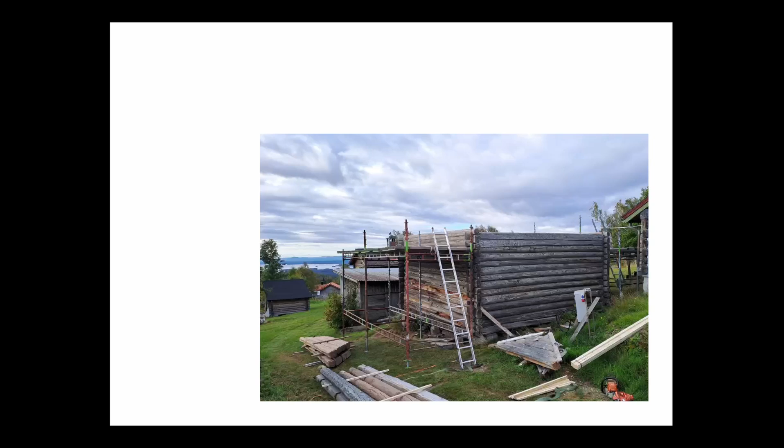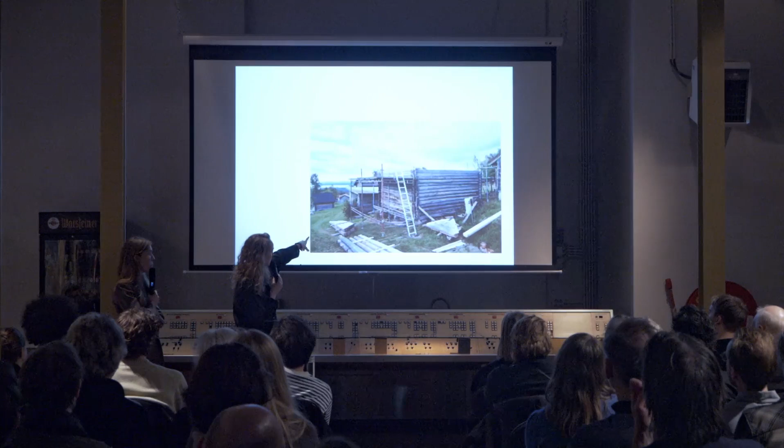In Fryksås, this is the site we're working on, and this is one of the buildings that were there when we started working. This is reused, so it's taken down piece by piece. You can see it's just put there on the ground.

The wooden logs are often really okay because they are grown super slow and allowed to be super old, so they are really in good condition when they are taken down. They can last for several hundred years.

So when you do something like that, you have to mark every log and replace the bad ones with new ones, in exactly the same manner, so this meeting is like the same meeting as that meeting.

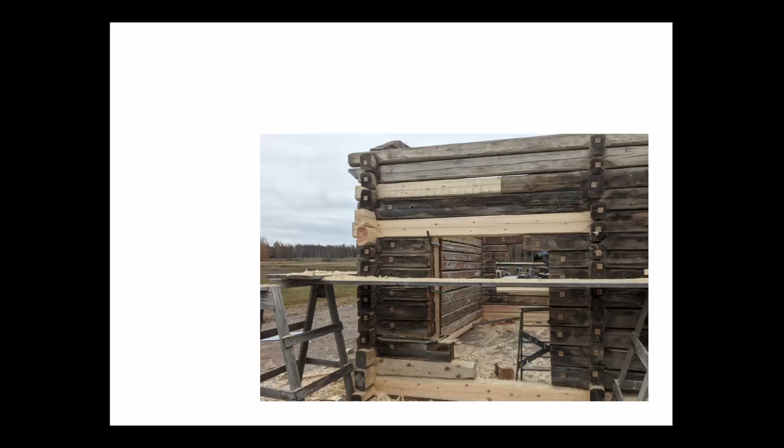This is often done not on site, but maybe at the workshop of the craftsman doing it. Here you can see the new logs and how you mark them to work with them. So it's actually quite easy to move an entire house.

Then the house is ready to be assembled on the new site, and that of course requires a lot of on-site engagement, as I will do on Monday, for example. As you can imagine, you can't plan everything down to every millimeter. You have to be able to make changes during the building process.

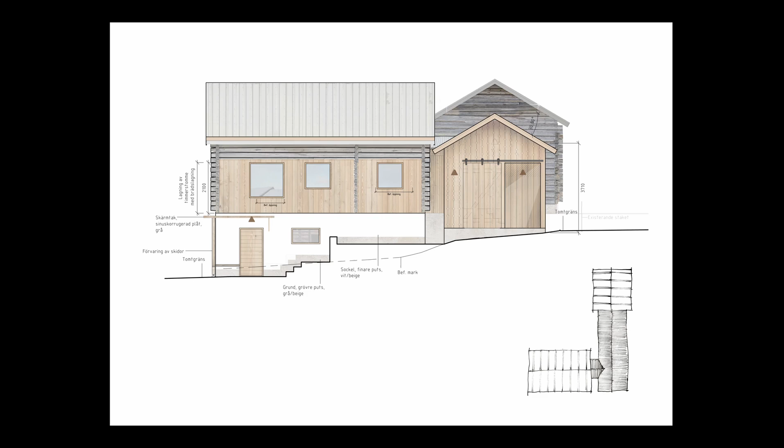Because the timbermen working with this can't really answer before they've done anything, it's very common that we're on site taking decisions, making decisions, trying things, depending on how the status is on the logs, etc.

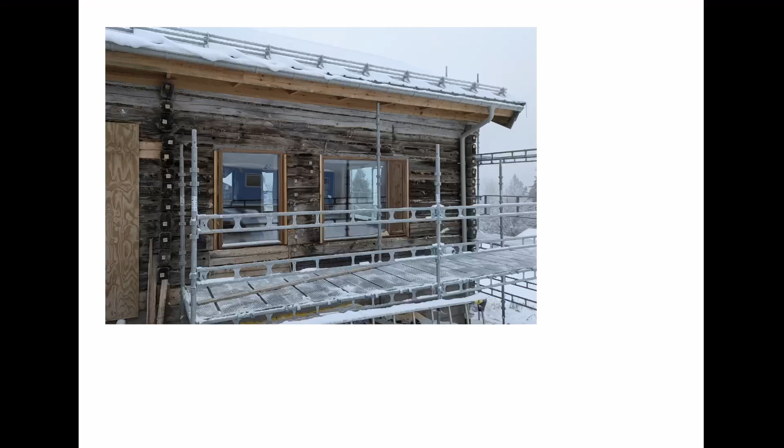This is a picture from some weeks ago when the snow had come, and you can see the windows are coming in. The windows differ quite a lot, and we had to find a rhythm with them because it felt good to relate to the openings already in the timber facade. We can't see it as a blank paper and put windows where we want; we have to look at where the logs are already cut, how wide it is, and how we could find a pattern that fits there. Otherwise the timberman is super annoyed, and it feels a bit strange too.

So that was actually a project we worked a lot on. Reuse was the start of the project, and this is another project where reuse was the starting point. It's a transformation of an old stable into part of a residential house or a home, where the stable was going to be the living room.

It's situated in a rural environment as well, a bit dense rural landscape, and what you can see a lot in the Swedish countryside is that most of the houses are red. So this is a really typical barn stable that you can see on the countryside in Sweden.

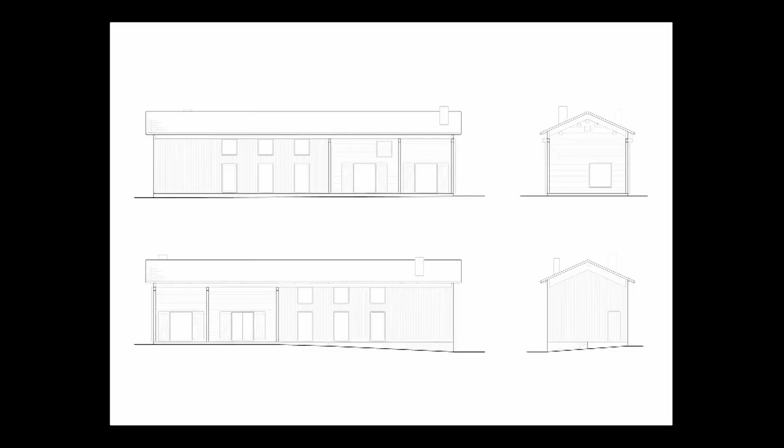We had to make a few adjustments to the roof, because when adding insulation, normally you do it on the inside or on the outside. We were talking a lot about how to do it here, because maybe it would be a good idea - since it's in this cultural heritage area, the exterior is really important.

But that room, and that roof, was so important for the experience of the room and the space. So we added the insulation on top of the existing roof, which gave this new hat in a way to the house.

So this is the existing building, and then we have this add-on here. You can see the old part and the new part. The black, everything that's black, is what's new, and the white is the existing building that was there before.

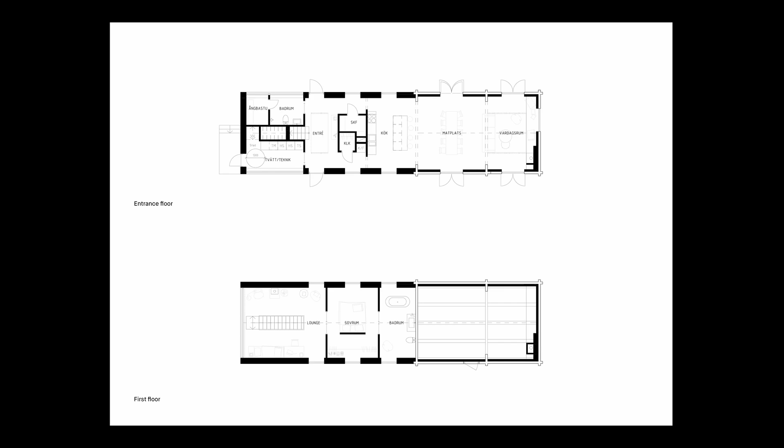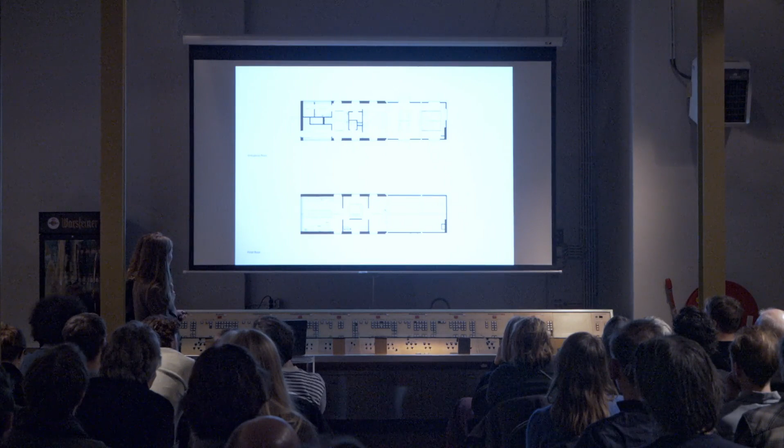It's actually this one, which is full length up to the ceiling, and then we made a two-story building next to it, connected to it, with entrance floor and first floor.

What was really important for us was the great experience in the room - that you have the connection to the roof, the facade wall, and that you are in this big room.

So it was really important for us to have this room's presence everywhere, actually. We made this small add-on in the middle, but otherwise the movement is throughout the facades.

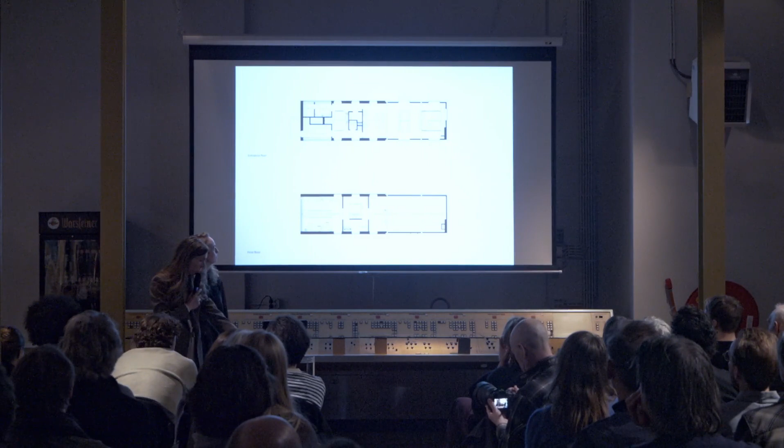In the project we showed you before, we took down each piece to move it and restore it. But here instead it was in kind of good condition, so instead of taking it down piece by piece, we lifted it to the side.

Actually, this is quite easy - well, of course it's not quite easy, but it took a few hours, with a lot of preparations before. It's not that big of a deal actually, but it takes a lot of preparation.

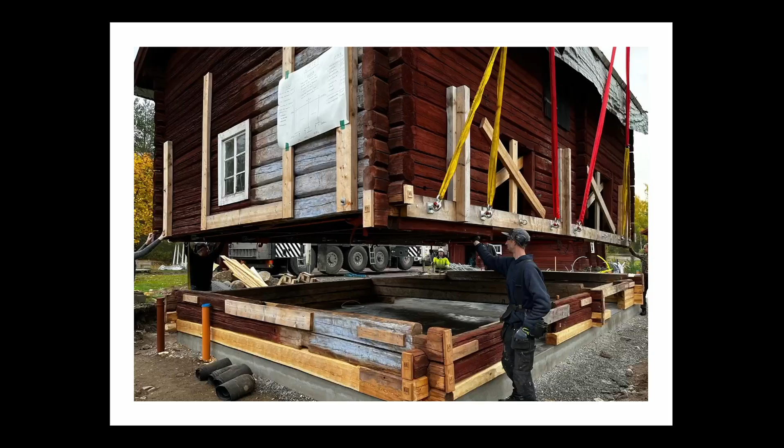Here, when moving it back, we took the opportunity to rotate the building 180 degrees, and then did some other things as well.

This is where we put it back together, and here you can see the joints where wood is connected to wood. When it's connected to these lower parts, you don't need to reinforce it in more ways - gravity is holding everything together.

Here you can see an example that the windows are still in, and it's perfectly fine to move it. You can see how they needed to secure the openings and add the beams to be able to lift it.

And here you can see the new concrete slab as well.

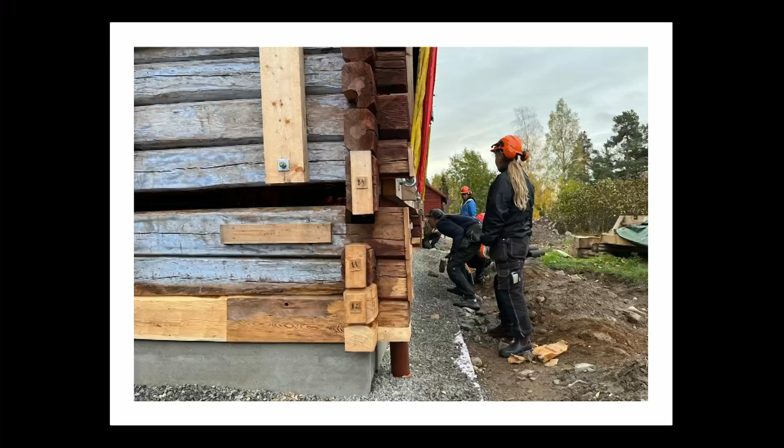Here you can see also that it was marked, because some of the logs were fixed during the renovation part.

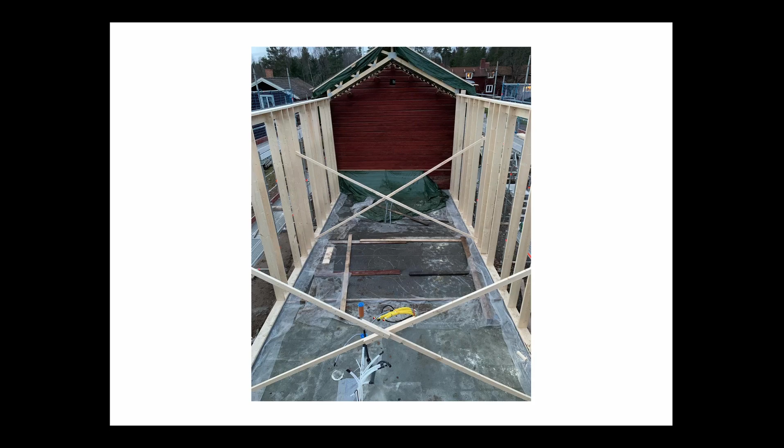And here you can see in the background the existing building, and here is the add-on that is with the timber log, like a new wooden frame structure.

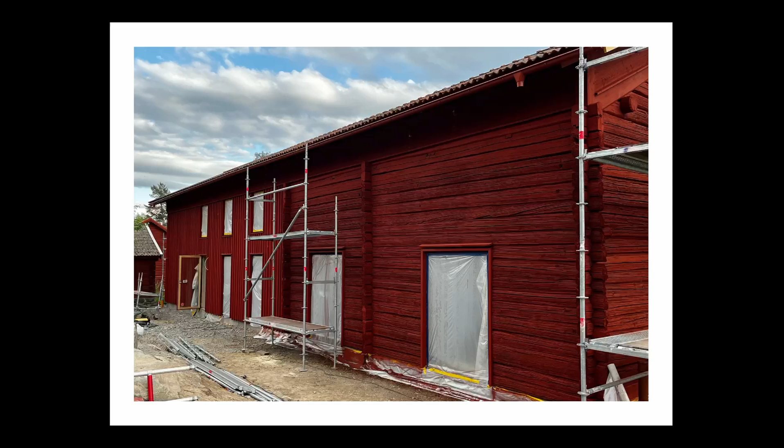Here you can see the two different parts: the old log house and the new timber, the new wooden frame house. It will always appear as one unit with a red paint, but it will always be very visible that it consists of two different techniques, with a very visible joint between old and new.

We worked a lot with how to frame the windows, and it looks really easy here, but to make it this narrow and thin, you have to work a lot inside the wall to make that possible. Because especially the old logs, they are not very precise. They are worn from weather and time, and you need to have a large distance for putting in insulation and everything. So it's a meeting between something done very rough with a chainsaw or axe, meeting something made in a factory, very narrow. So it looks simple, but it's very hard.

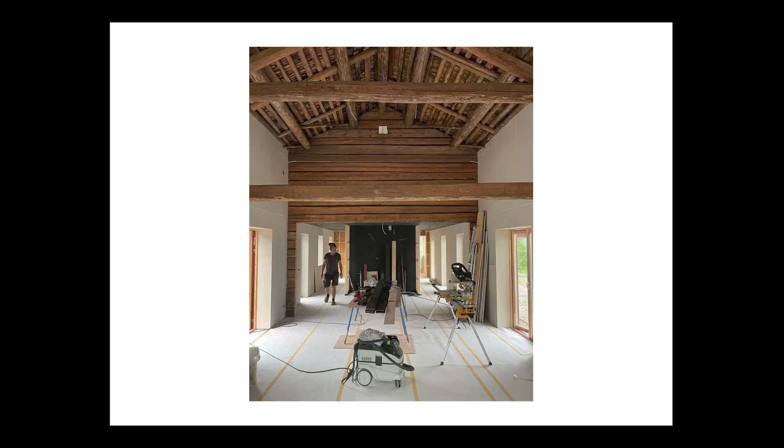And this is a picture from inside the stable with one of the clients going around working in the house, with the old roof and the insulated roof on top of it.

And why we wanted to show you these two projects is because we like to study historical techniques, historical buildings, historical wooden techniques, and learn from them. Our aim is to learn from the history, but also to move forward, so we want to incorporate this in contemporary architecture as well.

So these were two projects where we reused an existing structure, but we were really eager to see how we can work with these old timber techniques when making contemporary architecture, taking it into a more contemporary expression.

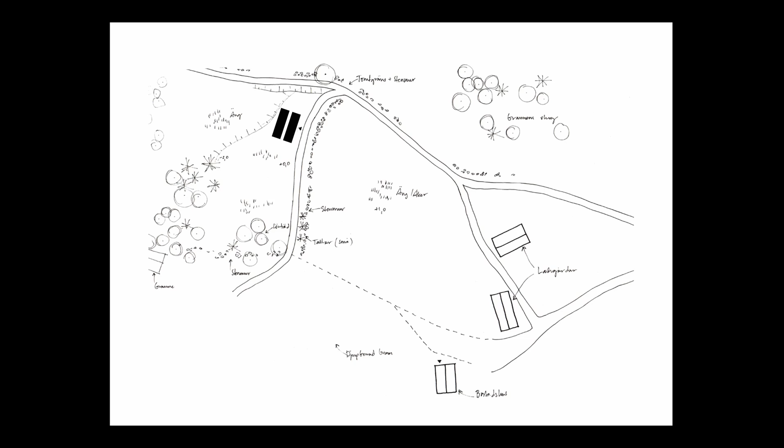Okay, so Höghult, which is the name of this small village, where the clients had this old farm with a lot of land, 3 small buildings, and they needed some extra space. So it's an addition to an existing farm. They wanted really small functions, a sauna, more bedrooms, and they wanted to be able to enjoy the view, which you don't have from these buildings, but you have from that site.

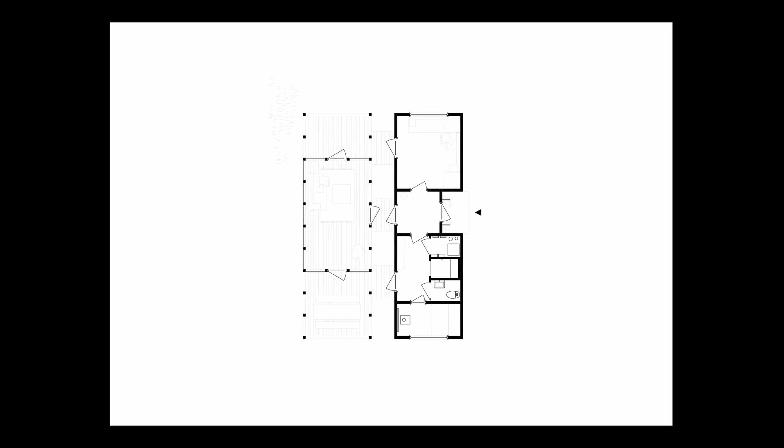And the road, there's a small road passing by this side of the house, so we divided the functions into 2 buildings. These functions here, like the guest room and the sauna, and especially maybe the bathroom and the changing room, etc., are rooms where you don't want any windows.

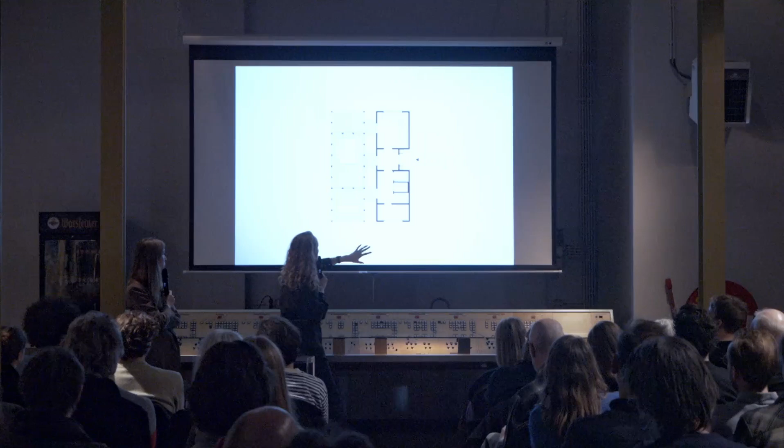And I can think of maybe one structure in wood that is not good for windows. No, I'm kidding. So then we thought, maybe a log timber building could be really useful, both for the sauna and for the other rooms that were not being able or could use any windows anyhow. And also, this facade is completely closed towards the road. And then, of course, you want to enjoy social events, or enjoy the view, and therefore you need windows.

So one house is timber logs, and the other one is made from something called timber frame. It's vertical, mostly wooden logs connected with wooden joints. It's often been traditionally used in barns or in churches, mostly in the roofs. So it's mostly like a roof construction.

And also, like in southern Sweden that we showed you before, it's used a lot. You more often use this technique because you don't have as much wood, so you can get the volume with less material. So it's a smarter way of using the wood, and then you can fill the holes with other things like clay or other things you find at home.

So we took the opportunity, not filling it with clay but with glass, to enjoy the view. Here you can see the view from the main buildings, and as you can see, it's surrounded. This isn't uncommon, it's quite a common view in Sweden, you see a lot of forest.

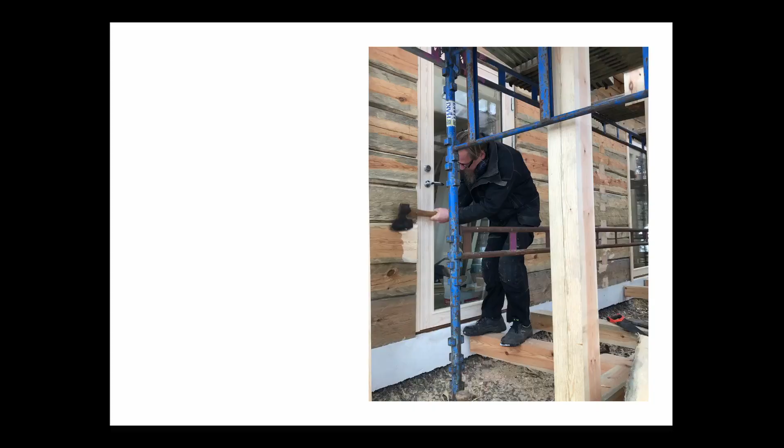So we already knew a network of maybe 100 timbermen and women working in this, in the southern part of Sweden.

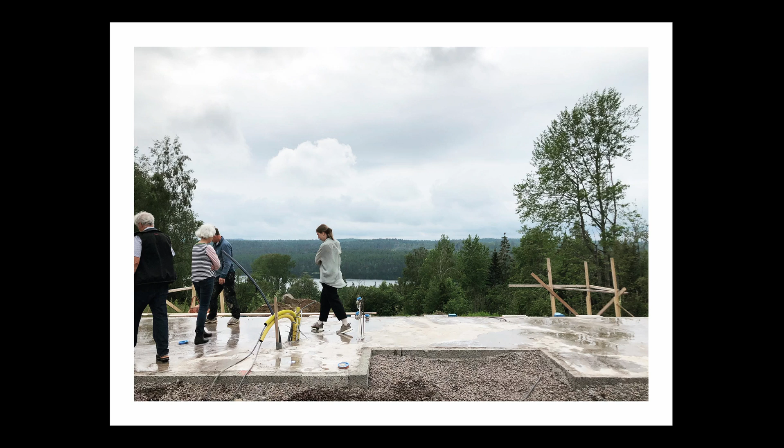So we got in contact with a group close by that we knew could be up for doing something like this. This is Mats, the head timberman. But those timbermen must also be able to feel confident working with some modern techniques as well, such as the client wanted a concrete slab, etc.

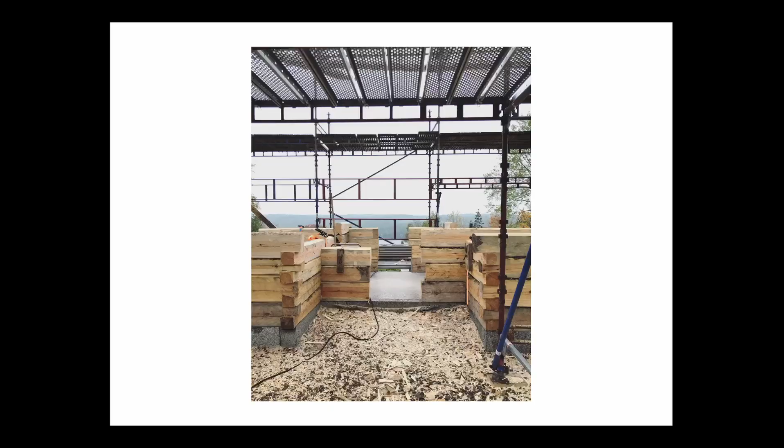Okay, so here's the building going up, and here is the group of people working on this project. We have the clients, we have Sofie, we have painter and clay master Mia, and timberman Mats, and his clients, and myself.

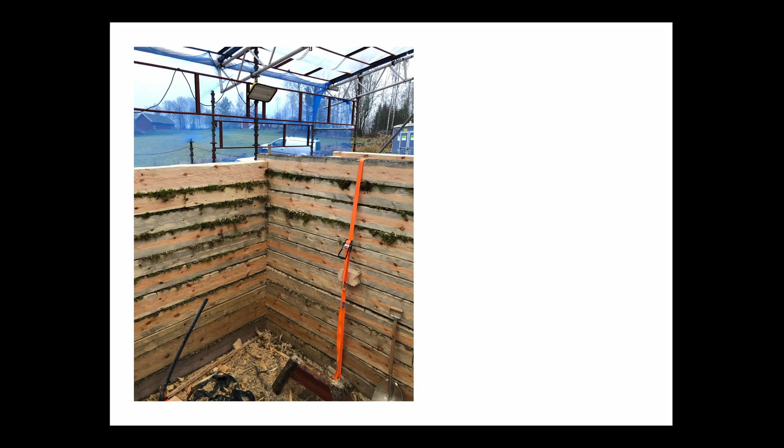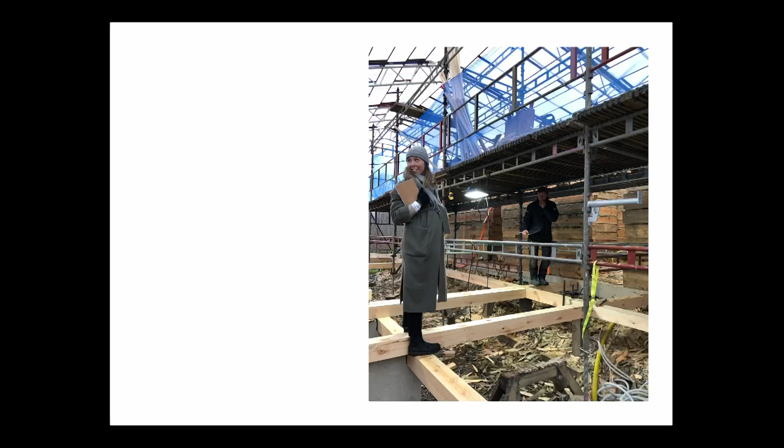It's super cool that they know how to do this, and they feel confident collecting moss to use as insulation between the logs. That's been used in all the projects that we know. And Mats and Sofie are jumping around there, and this is Mats' son-in-law using hand tools.

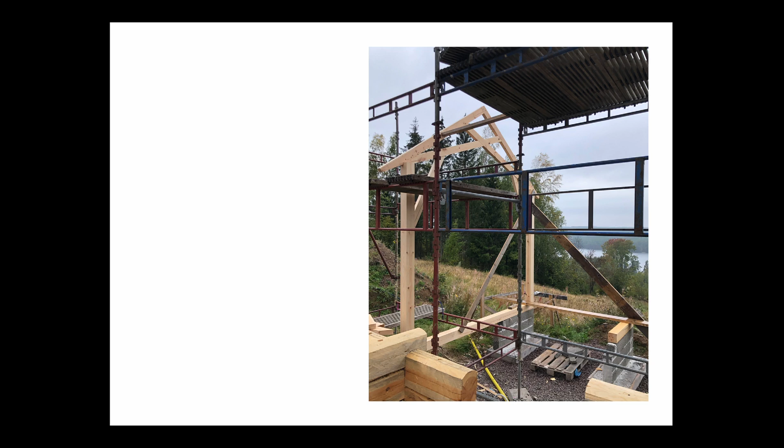And here are some details. All these joints, as we talked about earlier, are tested on site mostly, because we went to Mats really early having a discussion. We brought a lot of drawings, and we were making drawings together, but that's still just an assumption, because it's actually really mostly done on site.

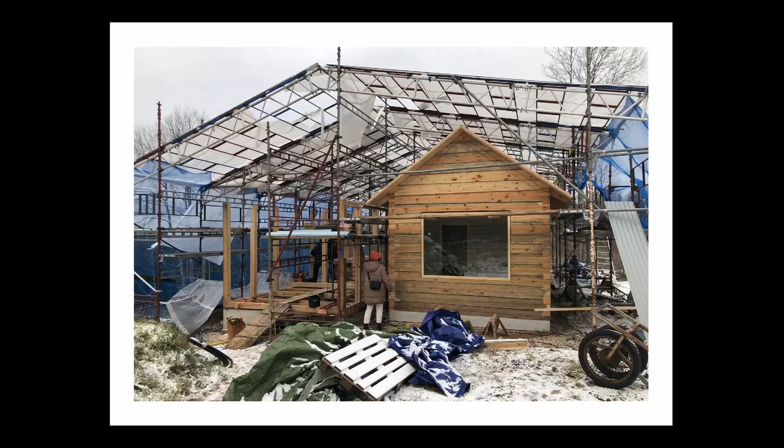So this frame here, for example, is just a mock-up for us to test the dimensions, both structurally but also visually. They test it by looking at the wood and feeling it and pushing it, and it's really made by hand, which is super cool.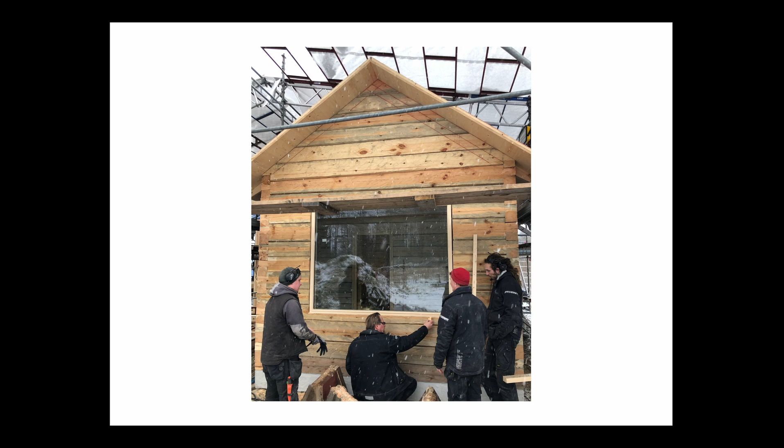And we have discussions on how to make these details around the window. This project was made before the one that Sofie talked about earlier, so we could use the knowledge we had here to bring into the red building. So this is kind of similar, as you could see, in some ways.

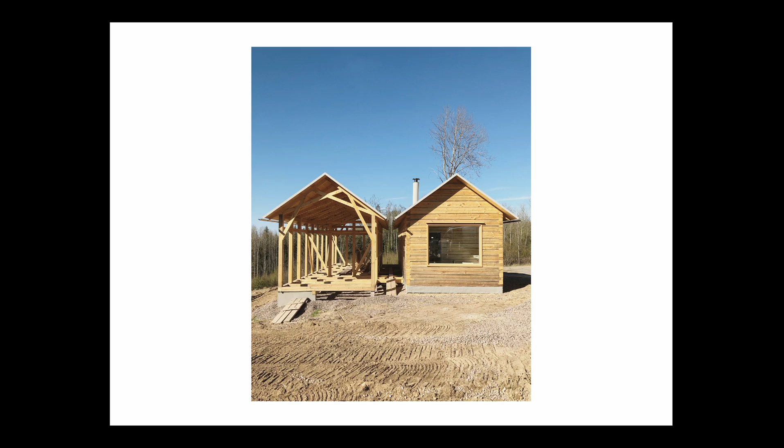Yeah, and this is from the bathroom or the changing rooms, where we've also used natural materials. So this is tadelakt, an old technique used in northern Africa. Is it used here? Do you know tadelakt? Yeah, great.

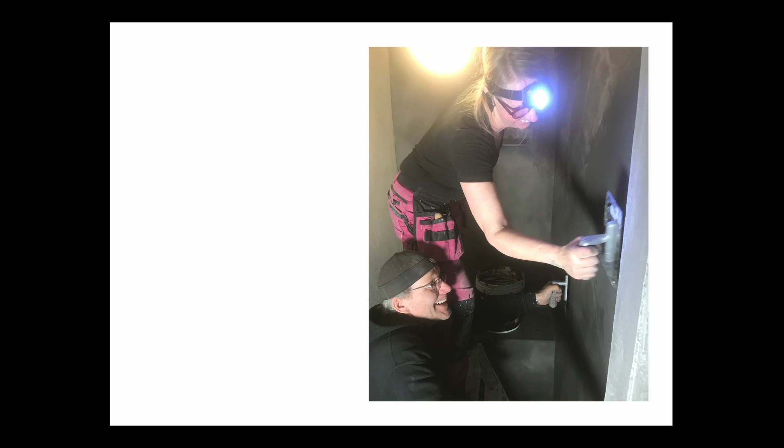They are happy workers, happy because they are super stressed - they needed to be two people in this really small room, because you have to work really fast. You can't quit and have a coffee and come back, otherwise there will be a really visible joint, so you need to work while it's wet. You need to continue.

So they're really working close together that day. And the result is a surface that could resist water in a really good way, and you could have it on the walls, up around the shelf and a bench, and then down on the floor, so you don't have any marks dividing it.

Okay, last one - we're just going to show you a few pictures of what we're working with right now. It's a design for a residential house for two musicians. They live in the southern parts of Sweden, on the west coast, quite close to our office. They have a site close to the sea, but it's actually in the forest, about 10 minutes to the sea.

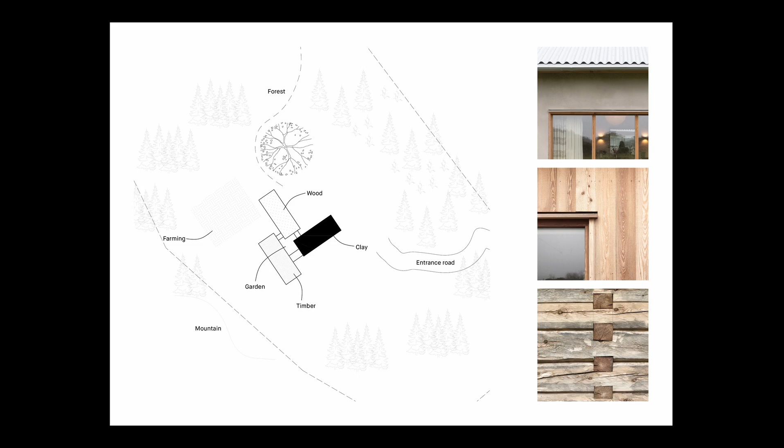But now you're experts in forest, so you see this is not a dense, thick forest - it's a really west coast forest with thin trees and huge rocks, and you can see the sky through it. That doesn't happen in Dalarna or Småland, it's darker there. So here we're experimenting with how we can work with this traditional method, but maybe we don't need to use it everywhere in the building.

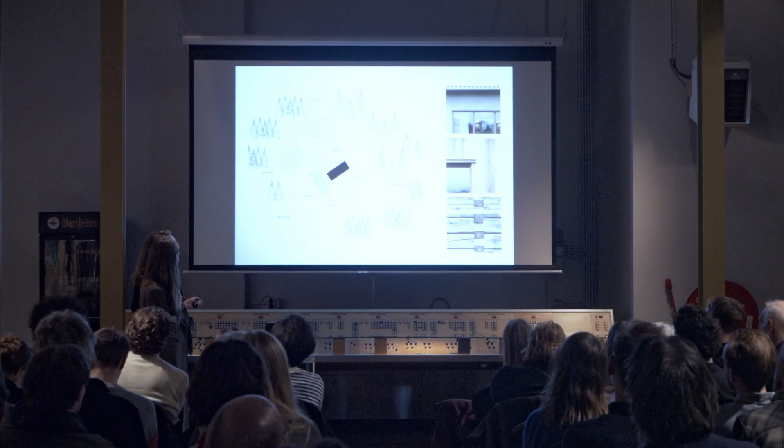So here we're working with one part that we are cladding with clay. We are working with one wood part, and this one is actually timber framing in the construction, joined together with small links, and there's a garden in the middle.

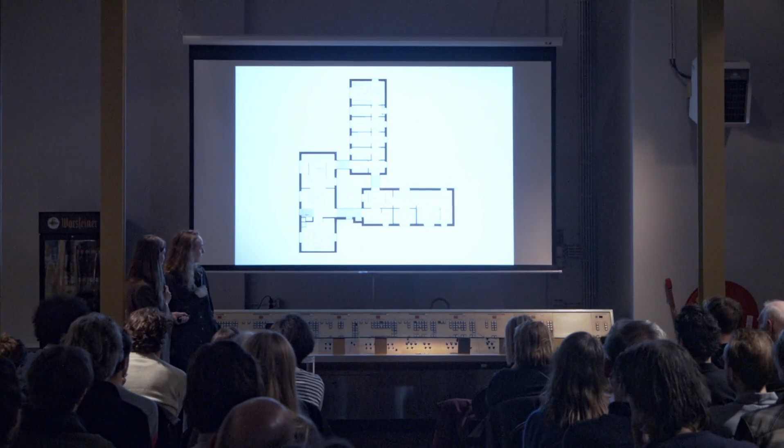Here's the floor plan, where you can see there is a social part, a private part, and this is what we call the active part, where they are going to live and work with their music, and also there's a stair down to the cellar.

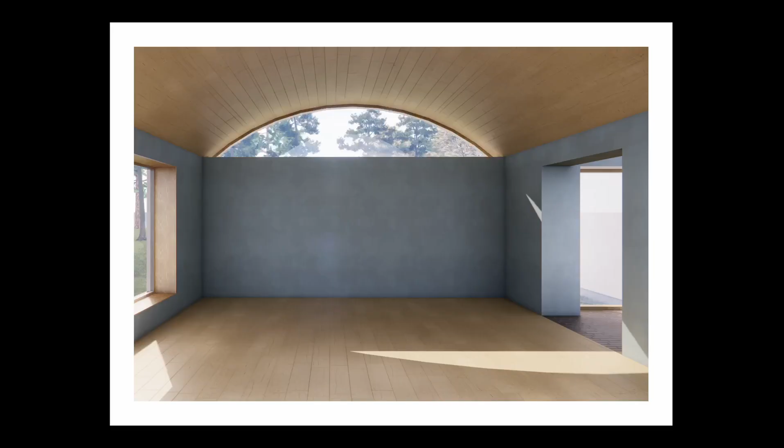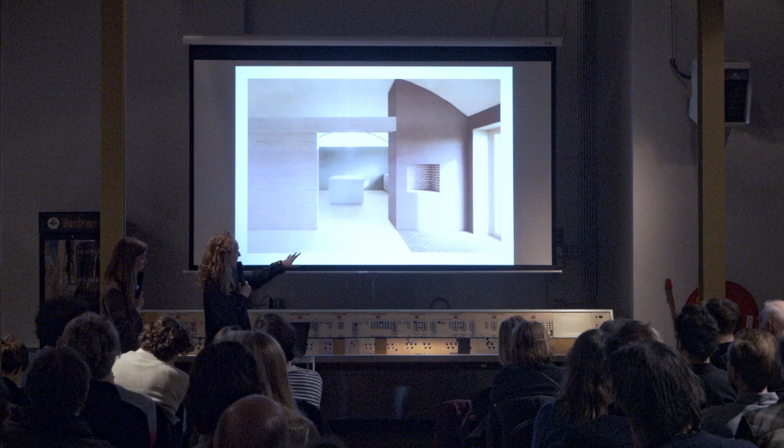So here we are working with a combination of clay and timber, and also working with this roof in not a really traditional Swedish way. You can see here with clay - this is how we imagine the living room and kitchen, with a presence of wood and clay and tiles or bricks, but still a bit more colorful with another shape that is maybe not traditional.

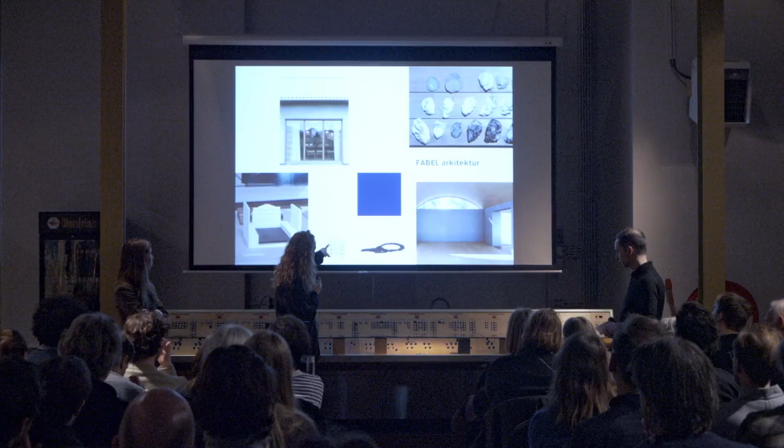There are some sketches from a competition we entered maybe 10, 11, 12 years ago. It's for a water tower in Sweden, so it was about how to add different layers to an industrial building. This net is a wooden net with nests for a certain bird. And then you had to—I hope you wanted a long answer because this is the long one—you also needed some kind of border to this water tower, so you could not enter. So this is like a water pond or small lake to be the border, not a fence maybe. We didn't win.

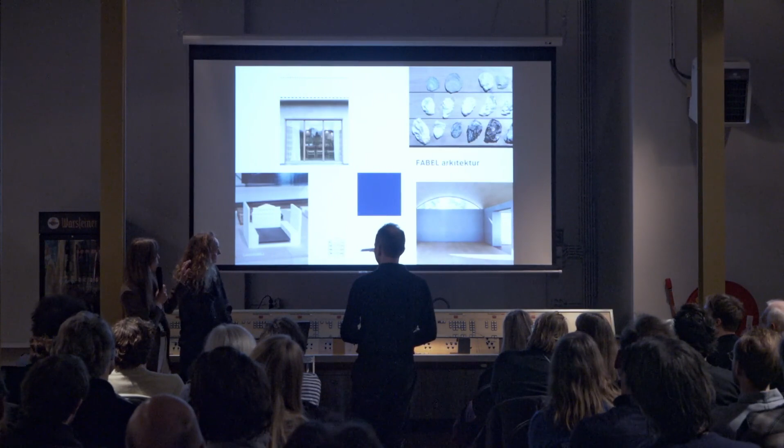And maybe you are wondering about the oyster shells as well. We're working with a client who dives for oysters, and she is developing a quite big business selling oysters and also making excursions, taking tourists out to fetch oysters with her. We made a home for her and also for her guests, and then we used the oyster shells as building material in the plaster, since she has a lot of them. So it's actually a waste material that we used in the facade.

There was another question in the back. Yeah, you wanted questions? Yeah.

Thank you for your lecture. I was wondering, because you're working extensively with local craftsmen, am I getting this idea now that Sweden is just full of local craftsmen waiting to work with, or were you in a very special space where you have that?

Both yes and no. I think there are a lot of craftsmen, and the heritage and how to take care of older buildings, we cannot tear buildings down, that's kind of growing. It's growing, that interest in Sweden, and the craftsmen we're working with have a waiting list for maybe 1 or 2 years because they have a lot of things to do.

In the western part of Sweden, we are engaged in a local craftsman network, and that is the largest one in Sweden actually, with about 125 to 150 members at the moment. Maybe that's partly because the university has education in the western part of Sweden that trains timbermen, traditional painters, building with bricks, etc. So every year new members come to this, to our area, close to Gothenburg, but 2 or 3 hours away.